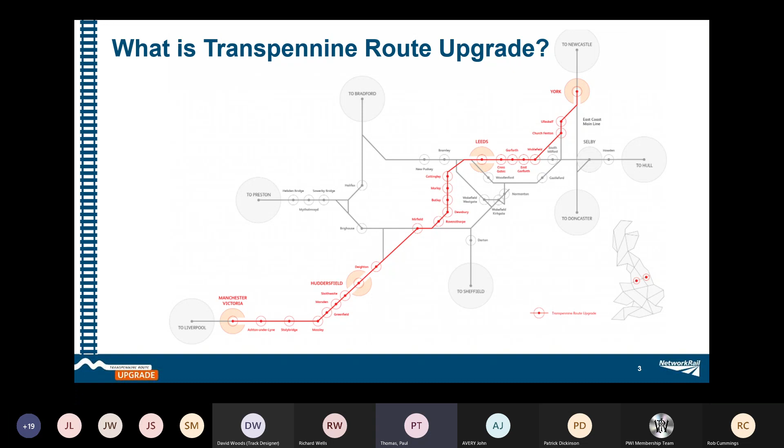So moving from what Transpennine Route Upgrade is to why we're looking at sustainability and carbon as part of the program.

But all other nations and levels of authority, from national down to regional, are moving in that general direction. And as we can see, the impacts of man-made climate change are only getting worse over time. It's rare that a week or two goes past without some reference to extreme weather events, be it droughts, floods, whatever it may be.

The emissions from energy production have fallen dramatically since 1990, mainly due to the reduction in use of coal, alongside a vast increase in renewables - specifically and most notably wind power, offshore wind power, and to a certain degree solar. So energy has now dipped below transport in terms of being the most emissions-intensive activity in the UK.

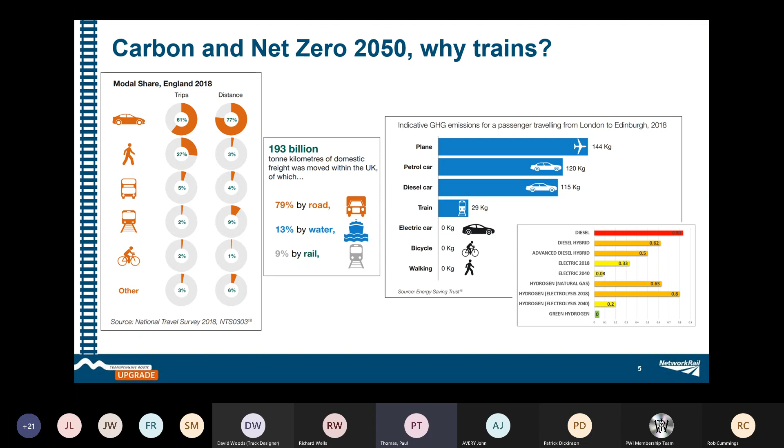So moving away from diesel to renewable energy for electricity, specifically with that greening of the grid - more and more renewable energy in terms of driving those trains. As we can see from that graphic in the middle, rail actually has a relatively small capture of the freight market. So looking at moving freight onto rail is going to have a massive benefit in terms of emissions, especially since trucks have a far greater emissions impact than personal vehicles. So the idea of all this is essentially shifting from road to rail and the associated environmental benefits of that.

So Network Rail are well aware of this, and they have recently released a new environmental strategy, which I'm sure many of you may be aware of.

Which is all around their ambitions for a low emission railway, with carbon being an absolutely crucial pillar of that new strategy. What they're trying to do is align with, as all industries are, those government targets of moving towards net zero by 2050.

Scope 1 emissions are emissions created when your organisation or programme is directly burning fuels, so things like burning petrol in cars, gas, etc. Scope 2 emissions are around the emissions associated with electricity that the organisation uses. And scope 3 emissions are your other indirect emissions, of which there are a number of categories.

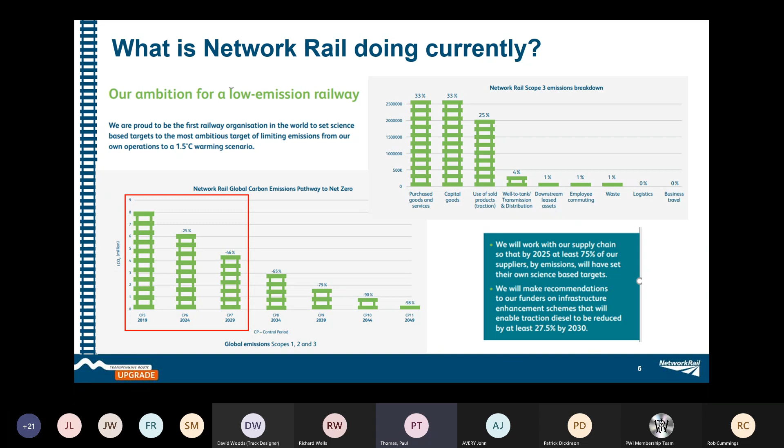So we kind of fall into that category of scope 3 for Network Rail, but that is obviously one of the more difficult areas to decarbonise from a Network Rail point of view, because they don't have direct influence over the different elements that make up those areas.

So there's a business case for TRU, which has had a number of iterations, and we're currently on the programme business case, following on from the outline business case. This is actually going through a review at the moment for a second programme business case, but as it stands, I've pulled out a few statistics from here.

Just to give an idea about what the impacts of TRU are going to be from an environmental perspective. The environmental case, obviously alongside the economic case, is one of the key pillars for how we're going to justify the build. Obviously it aligns with the Build Back Greener, the post-COVID agenda from the government, and again aligning with those net zero ambitions for 2050. But just a little table I pulled out there, just to give an idea about the level of impact.

So there have been a number of different iterations in terms of the options and the option selection for TRU, precisely what's going to be built and where. We are currently on option F1 and moving towards something called option G, which is our next and likely final option. Option G essentially has come about through the integration of TRU with Northern Powerhouse Rail, which is all part of the integrated rail plan, which was released back in January.

So this essentially adds some extra elements onto TRU that weren't there previously - some integration with wider rail infrastructure in the north, and specifically a focus on trying to shift more freight onto the railway than was previously envisaged, because at present most of the freight from the Liverpool area going east tends to go by road on the M62 for various reasons.

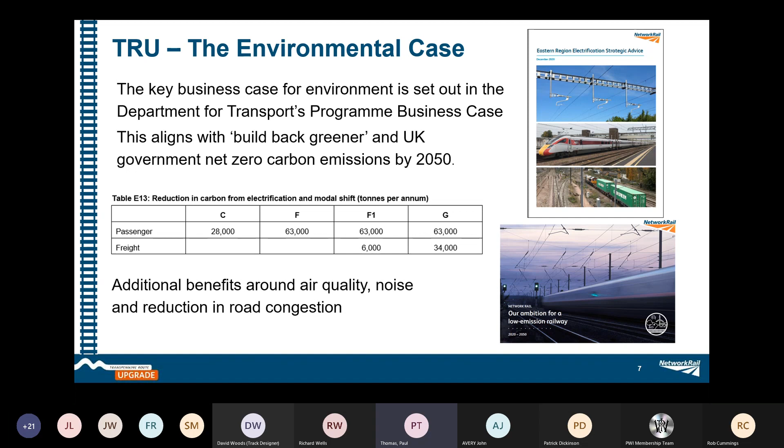So net positive biodiversity, looking to deliver a 10% gain in biodiversity over the course of the program. Looking at where we source our materials from, ensuring we're maximising resource efficiency.

And then a lot of aspects around the social side - ensuring that we're constructing the scheme in a caring and friendly manner to our neighbours along the line side, but also building accessible infrastructure, and a big focus on STEM and ensuring local employment, internships, things of that nature, working closely with local schools and colleges.

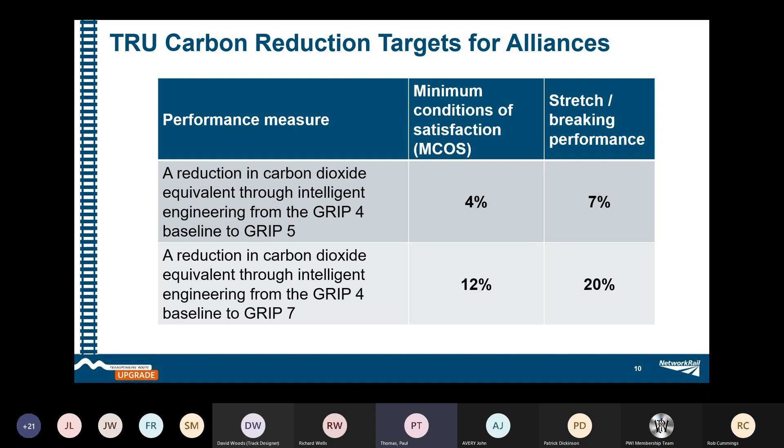It's not a perfect tool by any stretch of the imagination. There is other work that needs to be done outside of this in order to get a whole life cycle approach, looking at things like transport, the energy use within assets, and decommissioning. So there are limitations, but this is the tool that's been mandated at the moment.

But there is actually talk of us working on moving to something slightly more advanced and trying to unblock some of the key issues.

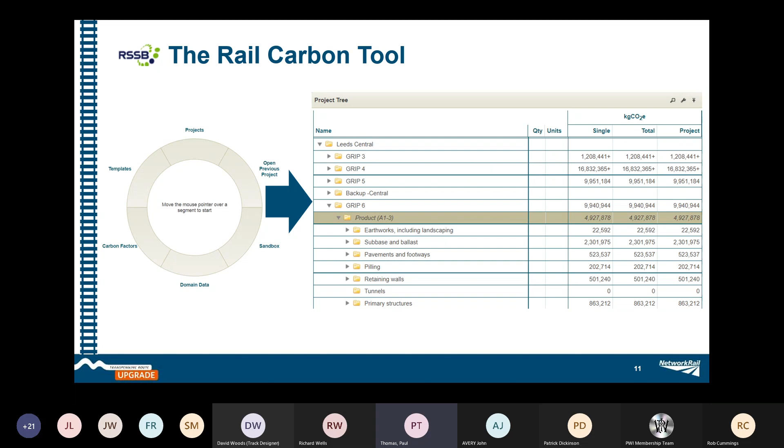So the designers and engineers, when they're looking at how to build the railway, have that information to hand straight away. Rather than it being a laborious process of toing and froing between engineers and carbon specialists, the engineers and designers can see exactly what's going on in terms of carbon with every decision that gets made, and we can therefore see the impacts of these different decisions and help guide them in terms of what lower carbon opportunities might exist.

So this tool has been developed by us at the moment. We've got other tools with similar purposes being developed by the alliances, the different construction and consultant partners on each alliance. Obviously each has their own tool, slightly different purpose, but essentially the overall aim is to speed the process up and allow designers to make those decisions in terms of carbon and take that responsibility, because at the end of the day, they're the ones that have the most influence.

So it's quite an exciting development. I think that's somewhere the industry is definitely going to be moving, because it just makes the whole process that much more efficient and puts the responsibility and ownership in the right place.

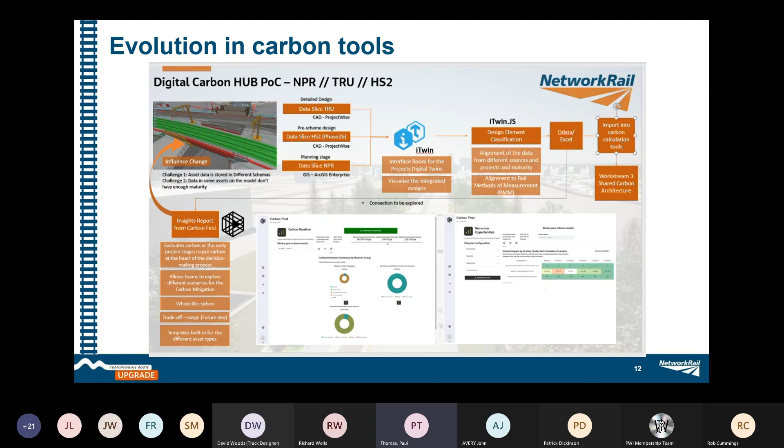Obviously things around planning and design, you're making large decisions and large changes - should we put in a bridge here? Is this better to be a viaduct or an embankment? These type of things, and obviously each of those decisions are going to have a massive carbon impact.

Once you get to your single design option and you're finessing that design, you have a lower impact essentially, because those decisions are going to be dealing with materials and energy decisions at a more granular level. And again, as you're working your way through the actual build, the ability to influence becomes even less. So it's important to have an understanding of what the carbon impact of your decisions are at that early stage. As per the previous slide, those real-time tools make that a reality and make life a lot easier, and will facilitate lower carbon options over time.

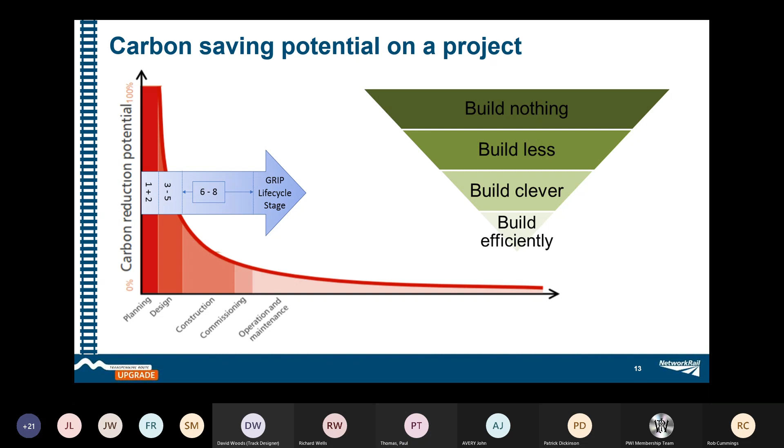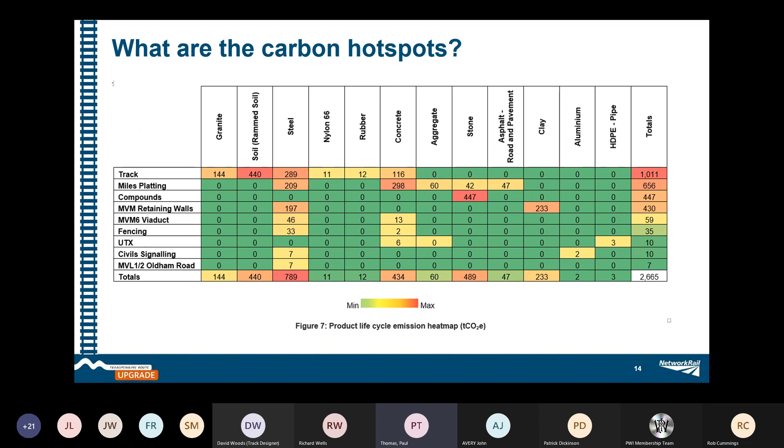So longevity of asset and durability of material is really important in terms of reducing that amount of carbon impact. It comes back to build nothing, build less - if you can use less materials, you're going to have a much lower carbon impact. So it's worth thinking about what materials are selected. This particular material might cost more financially, and there might be a slightly higher carbon impact up front, but it's going to last twice as long as the other option, and therefore overall is going to have a lower carbon footprint. That's why it's very important to think about things in the round and that whole life piece, not just specific elements or what happens up front.

I guess it's the same with costings as well - it's the capital cost versus the lifetime cost and the operational cost of a program, which need to be taken into consideration in order to get that full picture and ensure value for money, or in this case as little carbon as possible.

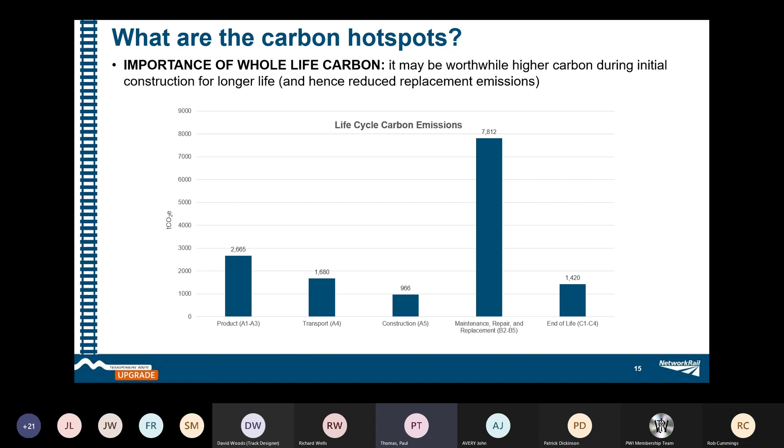Just touching on track here - and I'm sure you on the call know far more about track than I do - but that is one of the largest impacts for us on TRU. Unlike other major programs, say HS2 or programs building from greenfield or from scratch, we're replacing, and essentially this is a replacement and upgrade program. Yes, there are some areas where we're building fresh, in terms of going from 2-track to 4 or something along those lines, but essentially a lot of the work is around track replacement. Because track contains 2 of the most carbon intensive materials, being steel and concrete in terms of the sleepers, that means we have a disproportionate amount of the footprint which falls in the track category.

So it's a question of what we can do in order to reduce those impacts, and we are limited to a certain degree around the standards set by Network Rail. Before coming onto this program, I didn't realise that Network Rail had a maximum of, I think, 10% recycled content within rails, and moving from virgin steel to recycled steel has a massive carbon reduction opportunity. If you're limited by not being able to do that, it limits your carbon reduction opportunities in that particular area. There's a number of different activities taking place in terms of looking at these things for track.

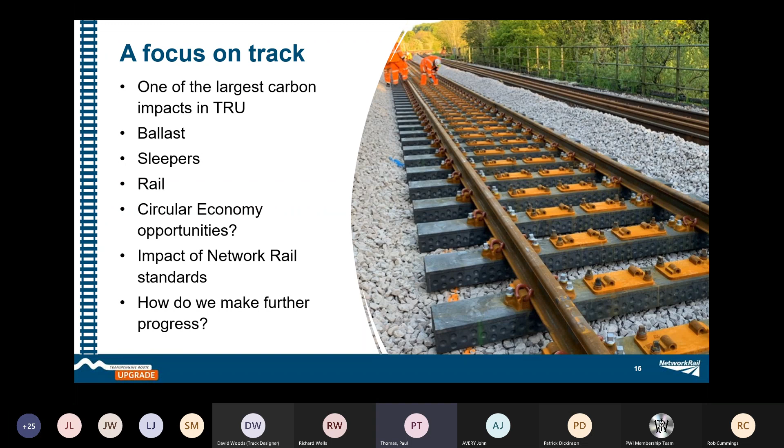But again, these are innovations and trials that we want to push on with in order to demonstrate the viability of these technologies. So I'd be interested if anyone has thoughts as to how carbon reduction might take place in track, and any other innovations we're not aware of on the program would be interesting to discuss.

Just a few examples of stuff we are doing. This is a slightly older one now, but essentially using a geotextile kind of expanded honeycomb panel, filling with granular material, with the idea around reducing fill. Just thinking back to that build better, build less aspect - using less materials to solve a problem essentially, and anything that does that, you're going to reduce your carbon footprint.

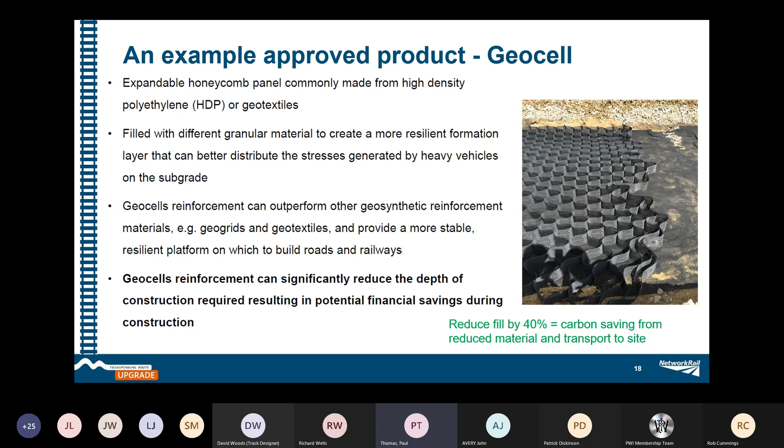There are various other things we are looking at or have implemented. So under sleeper pads is another thing in terms of track, increasing life span by up to 30%. Reusing what's already on site, trying to link in with some of the other work Network Rail is doing, which can be tricky sometimes because it's such a massive organisation, but there is actually a circular economy reuse and recycle program within Network Rail called Surplus, where they do a lot of refurbishment and remanufacturing of items, including things like points, so that can be reused elsewhere on the railway.

As I said, cement replacement - looking at anything to take cement out of concrete, and there's a variety of different companies, Tarmac and all the major players looking into this as well, so we're keen to trial as much as we can. Simple stuff like troughing - recycled plastic troughing rather than concrete for laying cables, much lighter, and again recycled, so you're reusing materials during that process.

And the last point on design changes - again coming back to that initial point around enabling the design teams to have an impact and understand what that impact is in terms of carbon.

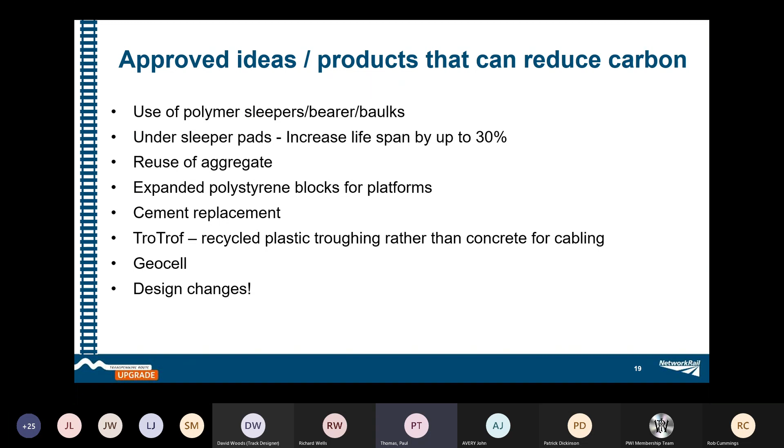So I guess I've touched on this, the process that we work with. The alliances run a number of workshops on the scheme, working with the design and engineering teams to look at ideas in the initial design phases around resource efficiency and designing out carbon. Both alliances run value engineering logs, so that's ideas from anyone, can be on cost savings or sustainability benefits as well, both for carbon and wider benefits in terms of waste, recycling, biodiversity, whatever it might be.

They're all captured and evaluated in order to identify any ideas that should be taken forward on the programme. The idea with this is that when one alliance identifies something that's worked positively for them, it's then shared amongst the group. We have a very good working relationship between the two alliances and ourselves as a programme team.

For example, every discipline has a 4-weekly forum. So I have a carbon forum with both alliances, and we can discuss best practice and these types of things that they've tried, and share across both alliances, which works really, really well.

So our role is around supporting with knowledge share, and also pulling in expertise from other programmes. Having myself worked on HS2, and a variety of other colleagues from Jacobs having worked on HS2 and other rail and highways projects, and again ideas from other industries as well - be that through the water industry, energy, Ministry of Defence, whatever it might be.